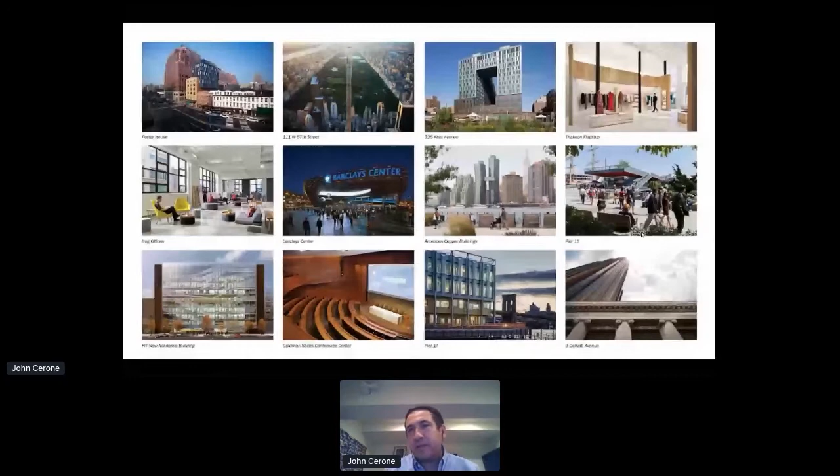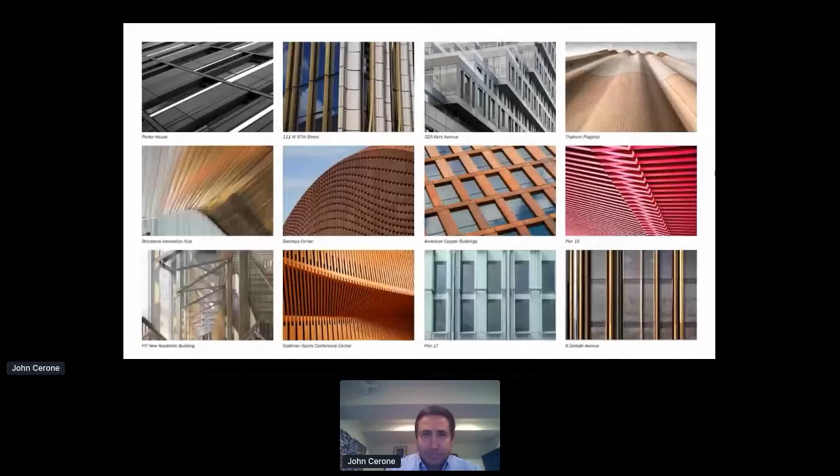And our approach to technology is really about delivery, a singularity of design and delivery, leveraging technology. It's about collaboration, it's about communication, and being very explicit about how projects are thought of, designed, and explained. So we challenge convention, and there's no more conventional approach.

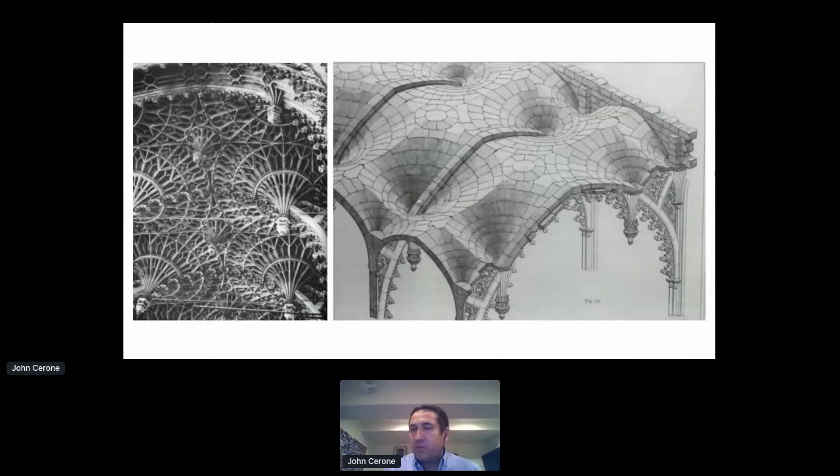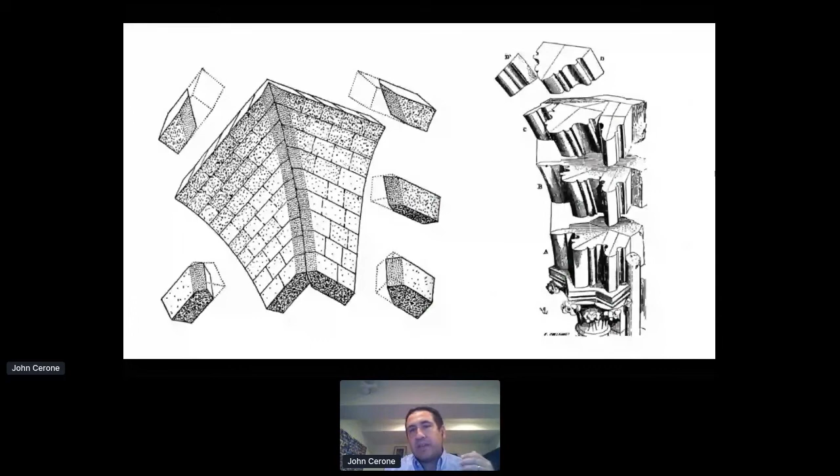With all the technology we have, how we work and how we think of spaces, it's still ultimately the drawing set. What architects do and what we feel we need to do is understand complexity, design complexity, and break it down to its constituent elements. Understand how pieces and parts that make the whole are made, and how we explain the assembly process to achieve the built environment. And we look towards other industries for this.

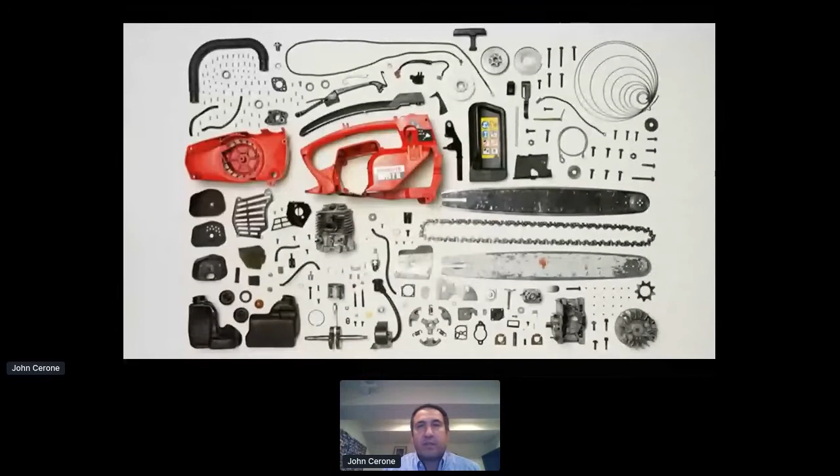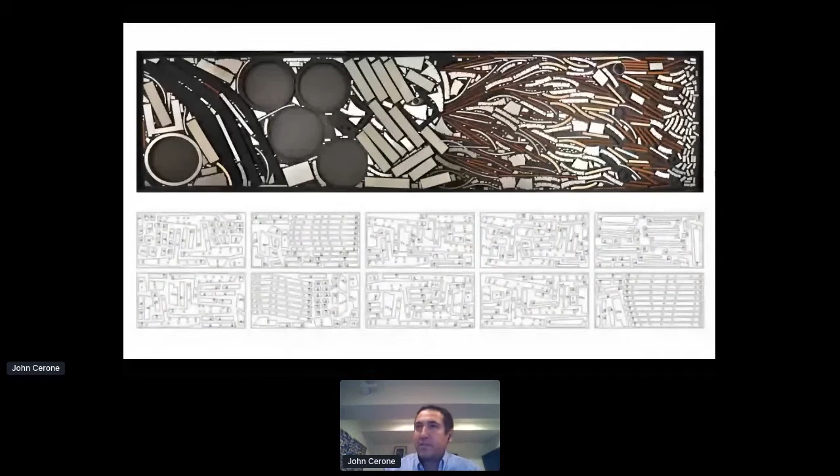We look at industrial design, automotive, aerospace, all intimately aware of the design and its constituent part to the whole. And we believe architecture can be designed, manufactured, and assembled in a similar process. It requires an intimate understanding of the processes that create the design elements, and deep collaborations with the people and machines that produce the components.

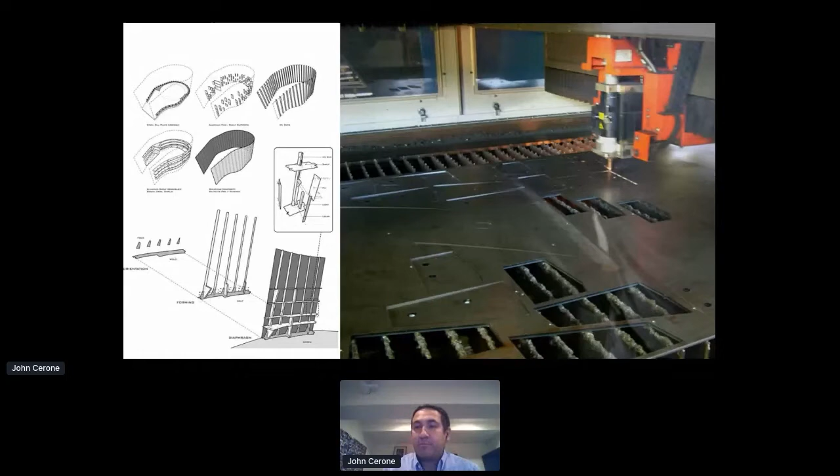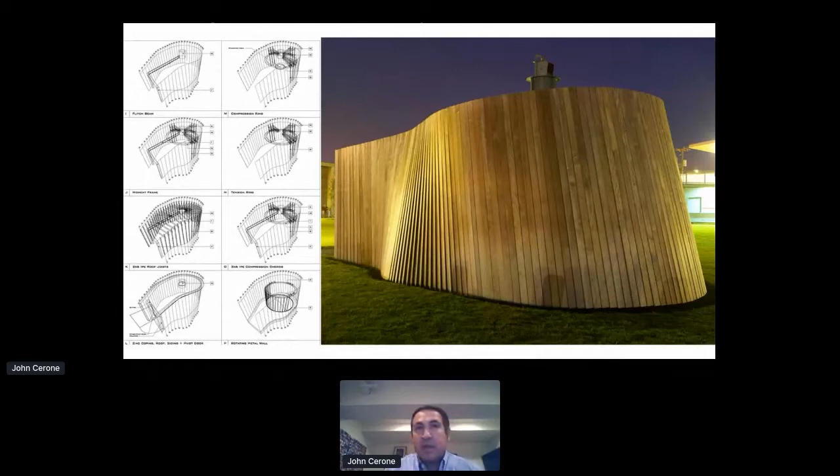When you have that understanding and that explicit relationship between design and part, it changes the deliverable. We start moving out of the two-dimensional drawing set, these thick packages of construction documents as we know in the industry, and we start looking towards assembly diagrams, much more illustrative and accessible information, free of dimensions and tags.

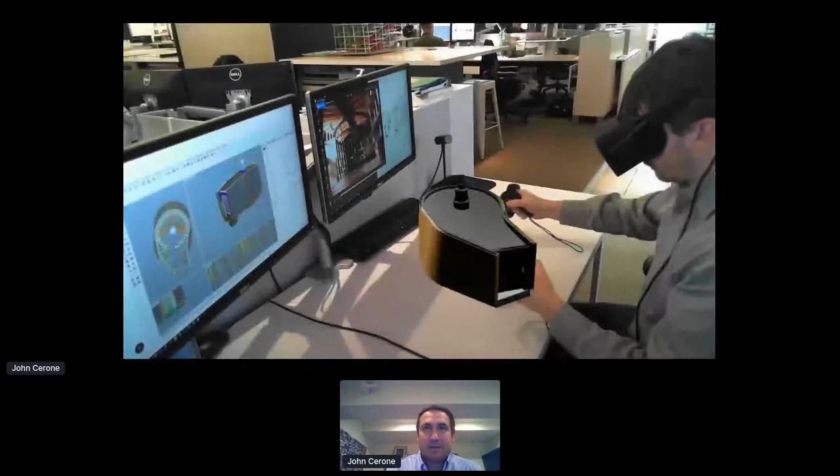And when we do this—we'll see if videos play over the hotspot, this may be a challenge—the interfaces, how we organize and operate our designs and communicate them, change. We start creating more accessible ways of deconstructing, calling out components, and manipulating and interacting with our designs.

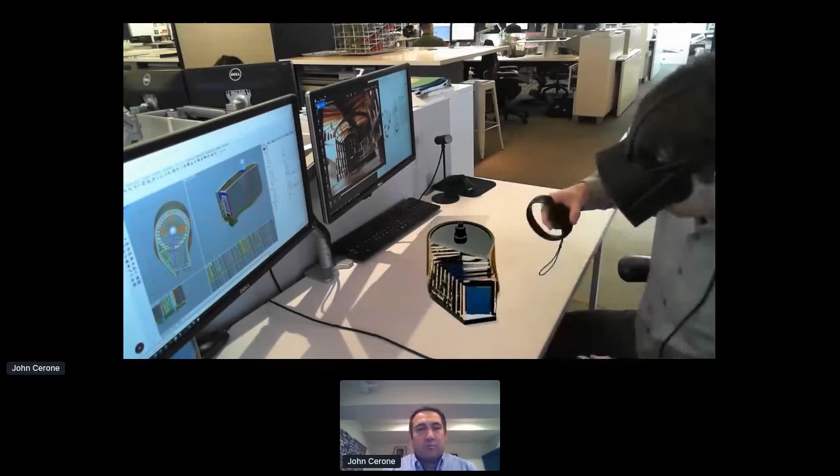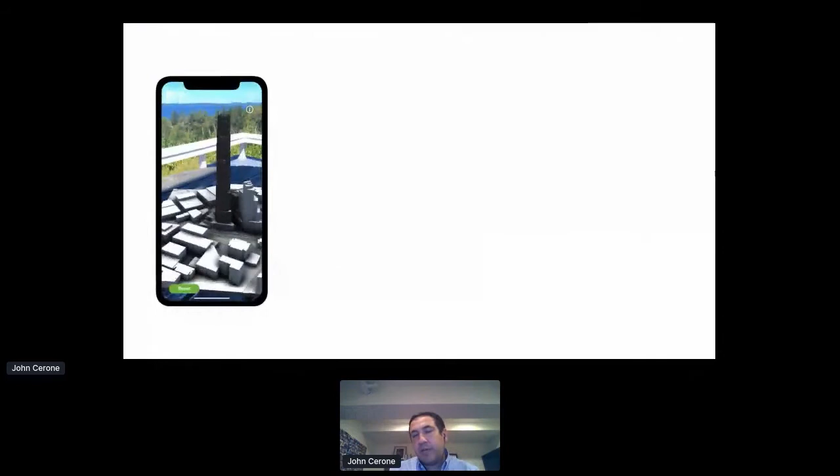And this is something where we have spent a lot of effort creating what I'd call UI, user interface for design. So how can we now take the projects with us in our pockets? How do we communicate them with clients, people that aren't necessarily three-dimensional CAD native? How can you interface with these projects and interact, provide feedback, and understand them in intuitive ways?

So our work is increasingly focused on these types of systems and data overlays. There are more videos in this, so this could be a challenge. I'll skip through some of these.

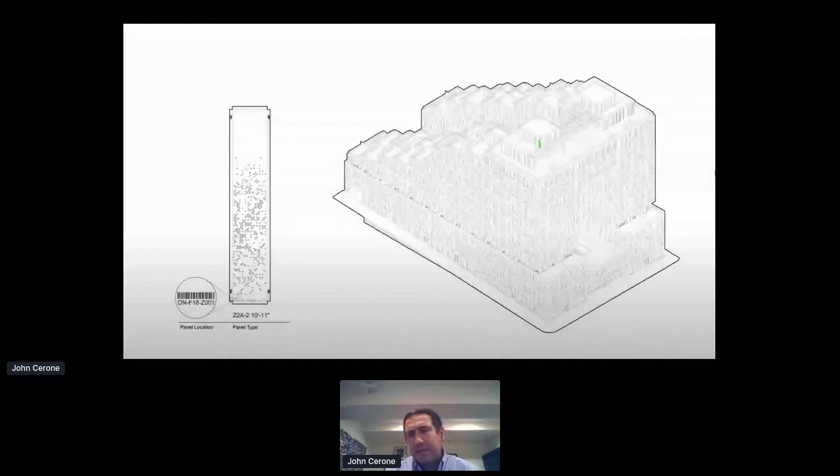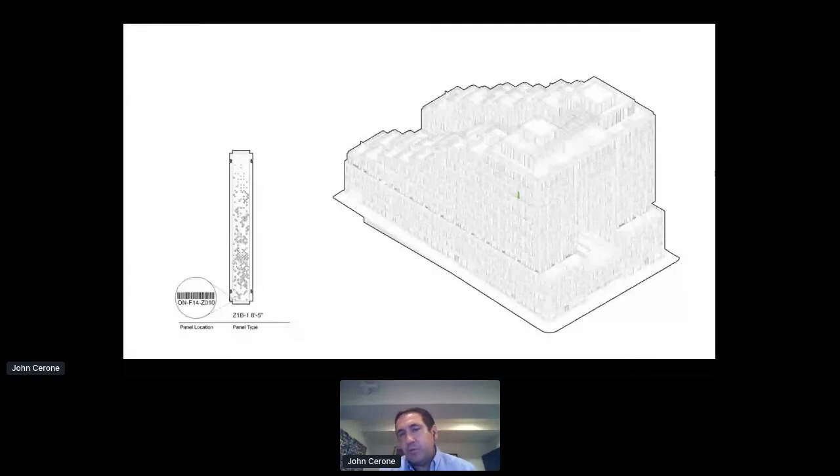But at the end of the day, we like to know exactly what is in our projects, the pieces and parts, individual components. Everything is labeled, everything has a name, and everything is immediately communicative from the design pipeline to the people, the machine installers, everyone involved, all stakeholders in the building.

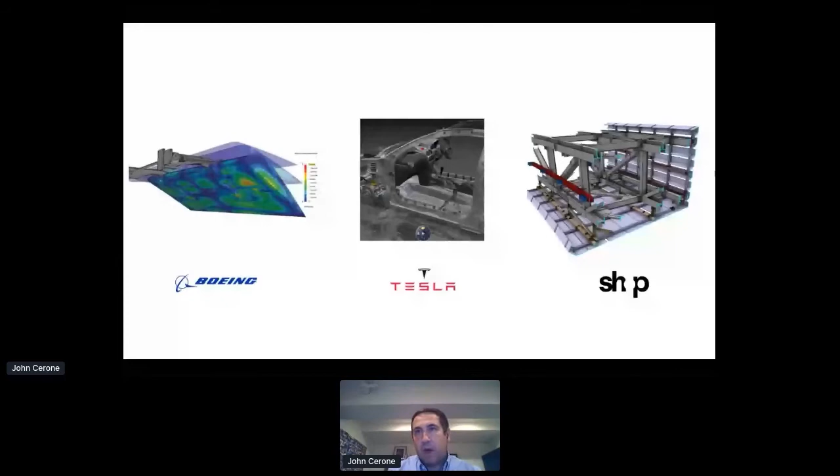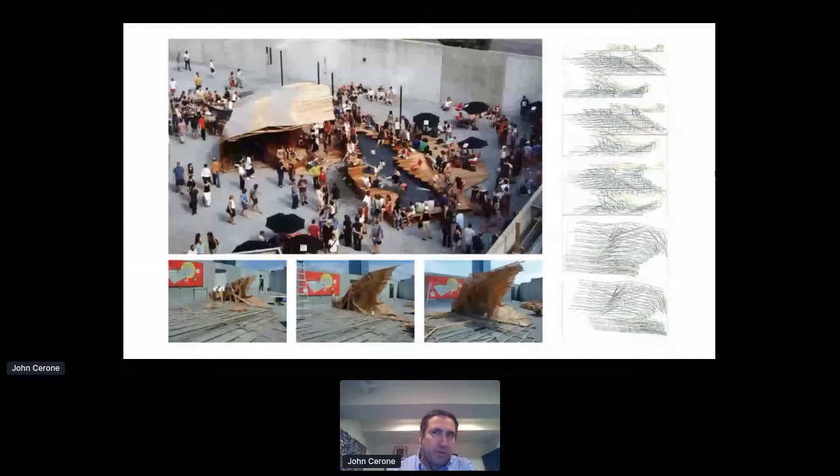We realized early that we had to move out of the traditional AEC tools, more towards industrial modeling and manufacturing PLM interfaces, and it's a DNA from the beginning of the office. Our first project, Dunescape, was about understanding a three-dimensional form, but using the computer not to create form, but to extract that and create the infrastructure and information to build it.

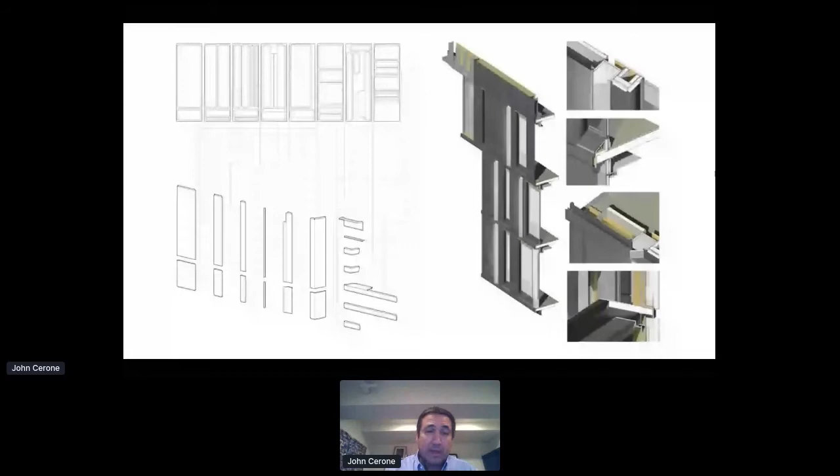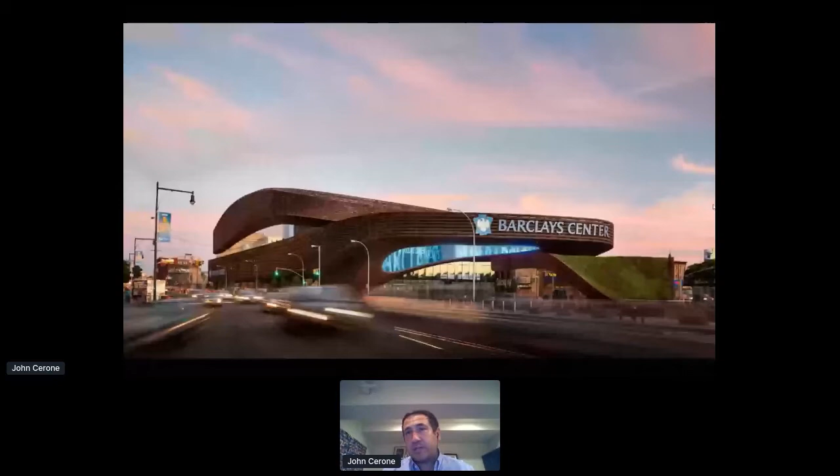We have more control over hundreds of thousands of parts, and this is really a design to manufacturing and assembly approach. It's a prefabricated system. All pieces and components modeled in the computer, prefabbed, assembled off-site, driven into the project and installed.

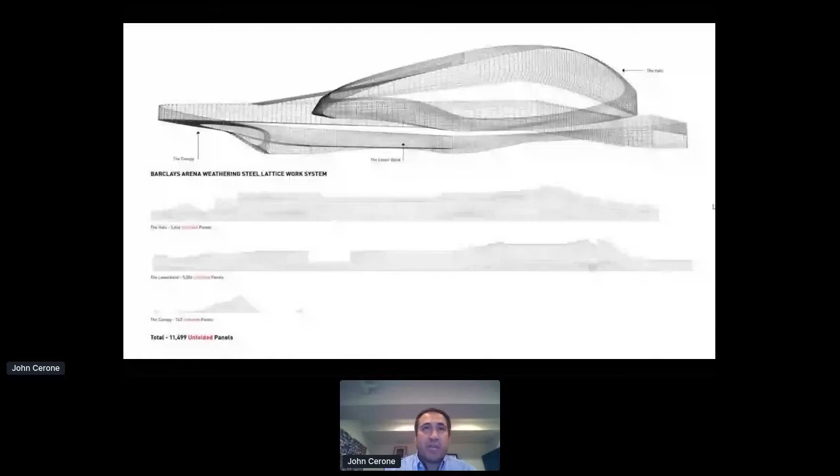Ultimately, what we realized is that from the design components, there's an immediacy from design moves. You should always understand to the part and panel what the ramifications of your design moves are, and from that you can automate fabrication. You can communicate directly with the people processing the information.

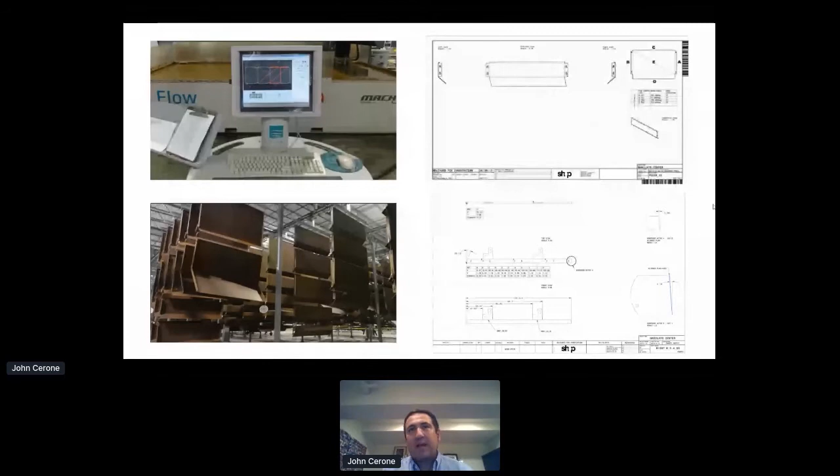What we understood is geometric rationalization and creating parts and pieces is not really the challenge. It's hard, but that can be automated. It becomes much more of a logistics constraint. So how do you track, how do you account for hundreds of thousands of parts moving dynamically through a factory floor, let alone a multi-nodal supply chain?

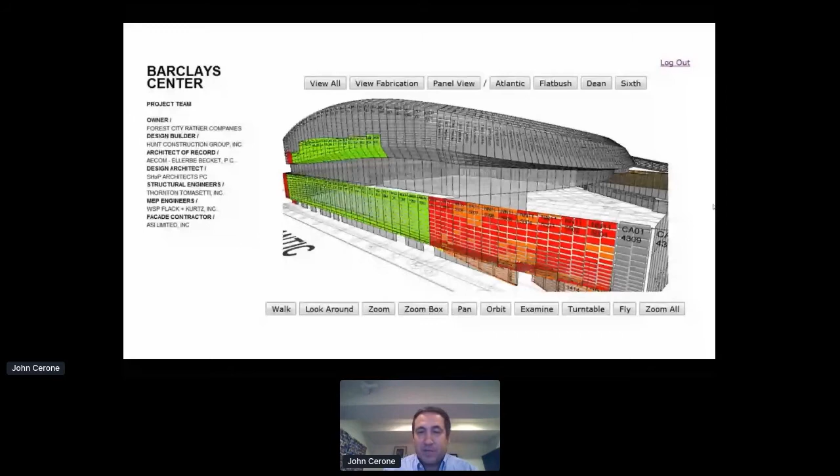So we spun up web viewers. We created all these ways of tracking parts, barcode tracking, to understand the project. This really laid out an infrastructure, a way of working that's portable.

So we're looking at a project in Gaborone, Botswana, Africa. We understand the digital infrastructure of how to achieve this. Hopefully this video plays, this is sort of an important one, so I'll give this a second.

But we start to understand our portfolio of projects, not from the part and piece - we don't reuse those - but process can be reused. We start understanding our projects as a collection of processes.

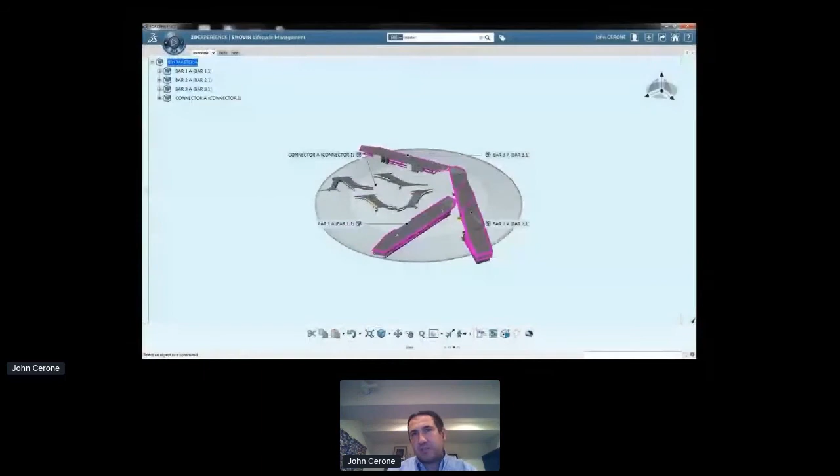And this power of 10, we can move through the building, to the part, to the block, to the scope, to the trade, down to an individual facade component, and from that down to the bespoke panel that rationalizes a geometry in a piece.

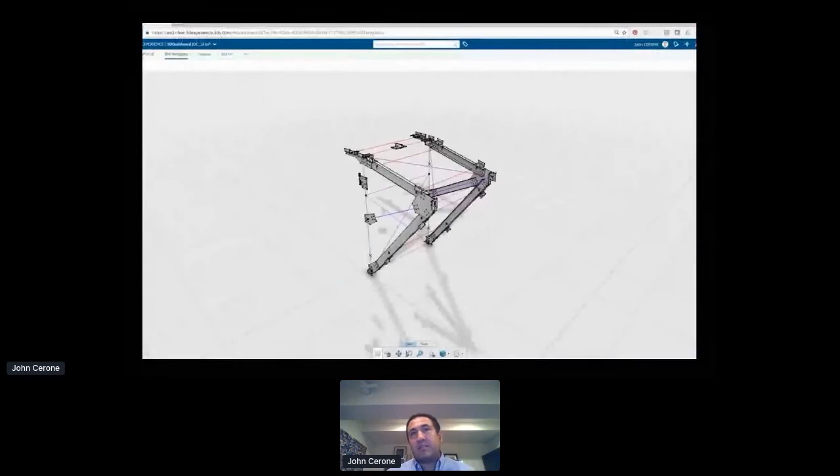And the way that this works, it's not rocket science. It's built on this agile wireframe of parts and pieces that you then apply as you receive information from engineering, from manufacturing, material constraints - you start applying pieces and parts to these flexible skeletons.

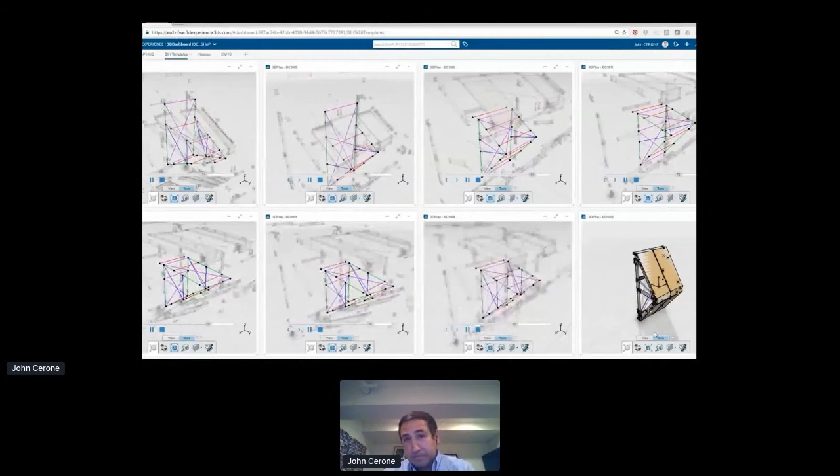And from there, you can create templates of process. So all the information necessary to manufacture, to communicate the design on the floor for assembly, can all be encapsulated into templates and basically pasted around the building at a one-to-one scale.

Information is accessible through online dashboards. Every piece and part is accounted for. We've rebuilt the tracking tools from the ground up, moving away from third-party software to have control over data, information and visualization.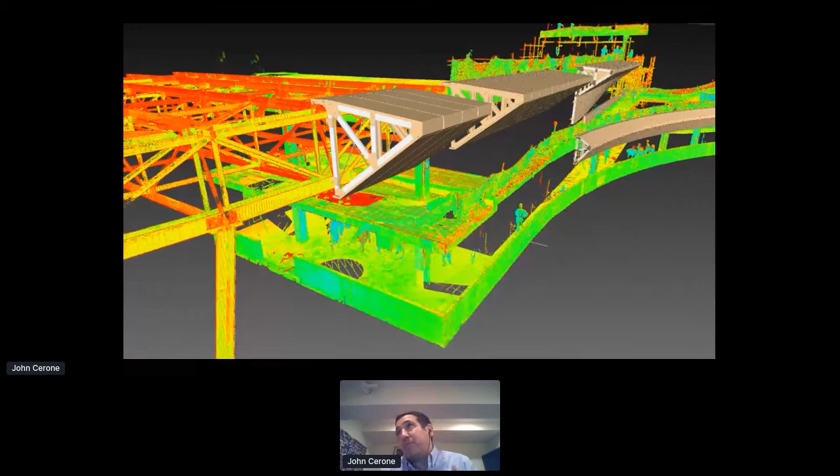The idea of digitizing the site and context in real time to coordinate the build site from our desks in New York, and minimizing the deliverable, right?

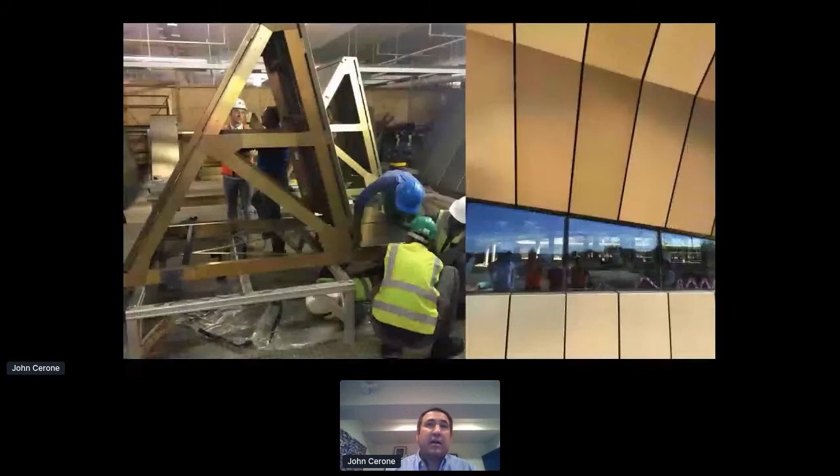The parking garage of the facility became a sort of pop-up assembly factory, a tier 1 plant. And you're able to achieve these results - high-end, highly refined, high-tolerance parts - remotely, and with very little derivative byproduct for explanation, drawings, and such.

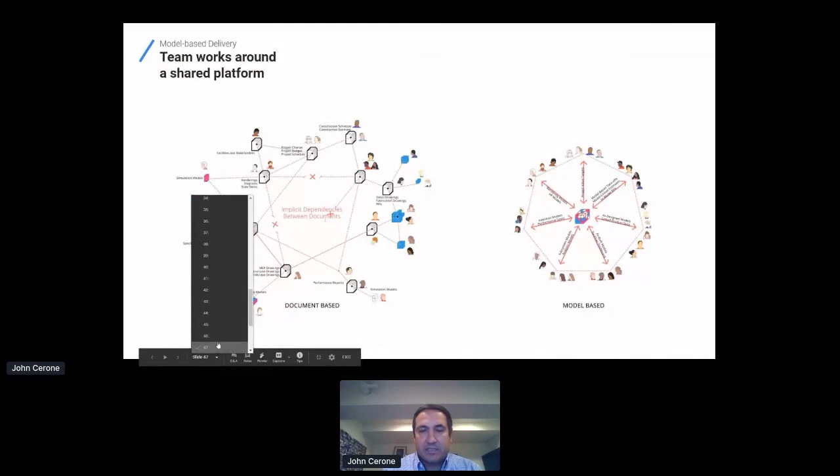I know I'm at time, but I'll add that we're increasingly focused on centering, educating all of the stakeholders in the project - clients, subs, collaborators - around this digital model. And I think what we're seeing is that through processes like...

Product materials, CLT, which is a very healthy, sustainable material - it's a manufactured good. This can be automated, can be machined and assembled.

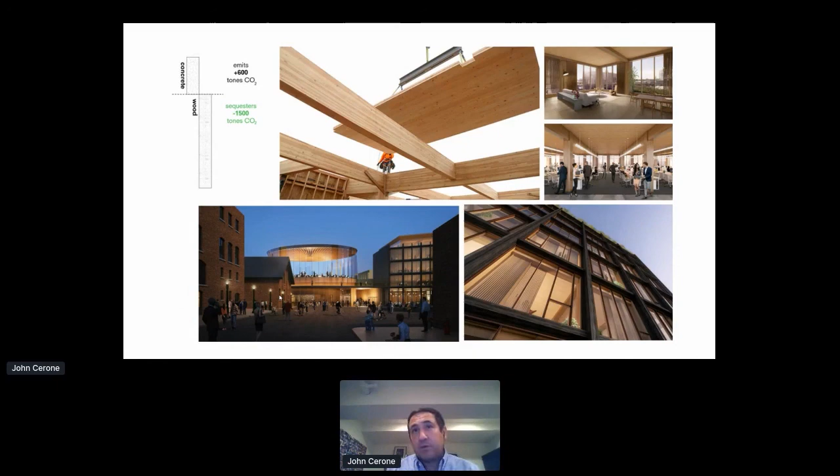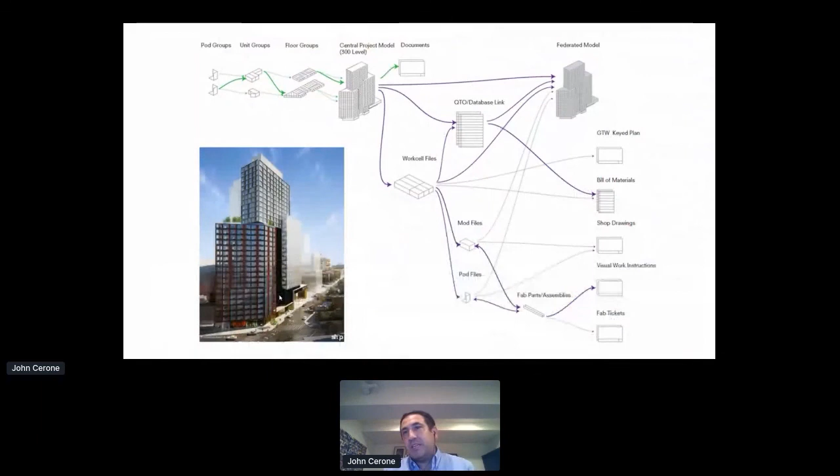We're starting to look at how you manufacture the built environment and produce capital A architecture, and it's about understanding data workflows, processes, and being in control of the design information.

And ultimately, we do feel that design space - our screens and our design environment - is starting to be involved much more in processes of logistics and multinodal supply chain networks. And this is how we believe great design will be achieved in the future, in the near future.